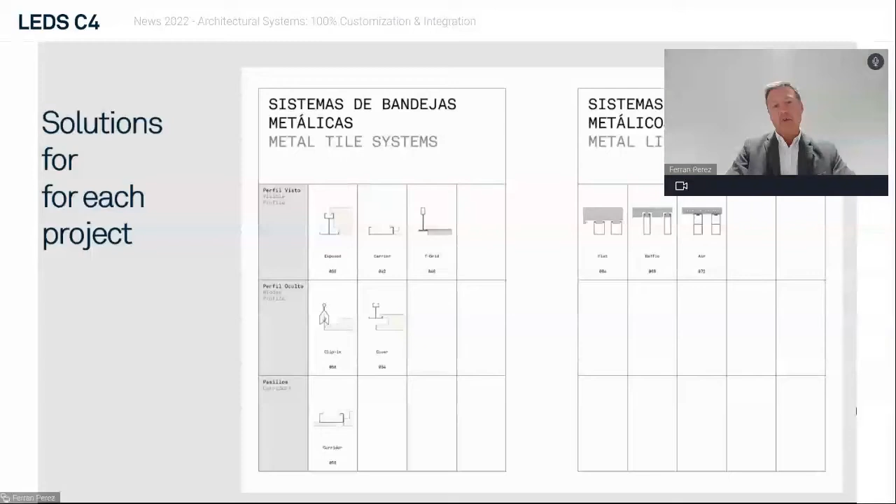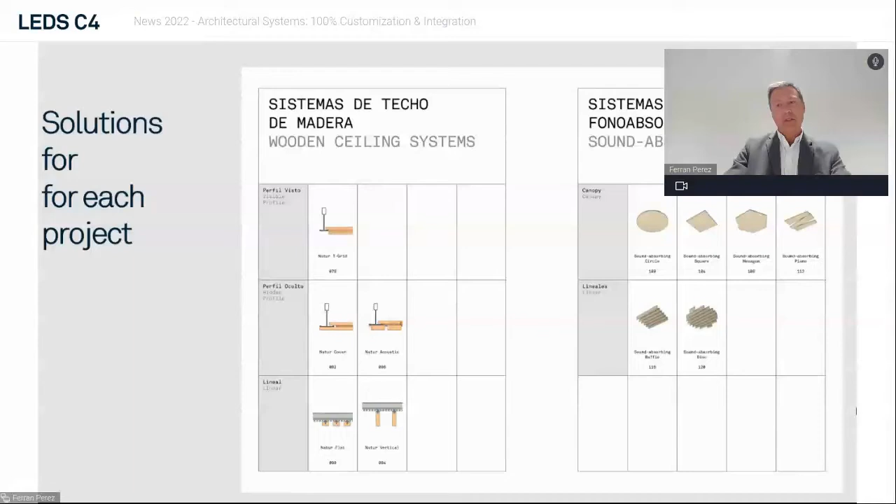In this catalog there are some blocks or columns of products related to the ceiling: metal ceiling system with visible profile, hidden profile, or specific applications like corridors, which is a metal linear system. We also have a wooden ceiling system, with visible profiles, hidden profile or linear. And the last one is about the sound absorbing system, canopies or other elements for sound absorption.

We would like to remark that we would like to collaborate with you in the creation of the project. Why? Because we have a big capacity to adapt this product, this ceiling, these tiles for your specific dimension, for a specific requirement. This is not a standard product that we have in stock or that distributors have in stock. We make the project with you, for final installation by the installer on site.

We pass the standard regulation in the European market, CE mark. We pass the ISO about quality, and the ISO about environment management. We pass health and environment responsibility regarding organic compounds, volatiles, and formaldehyde. Recently, LEDS was awarded the gold medal for sustainability. EcoVadis checks the environment, social and human rights, ethics, and responsibility pursuit.

If we start speaking about the metal system, we pass fire performance with a very good qualification: A2, s1, D0. What do these numbers mean? A2 speaks about combustibility - we have a very low contribution, the flame remains only 20 seconds. The second one speaks about smoke opacity - we have a very low contribution. The last one, the D0, speaks about particles, the drops of burning material - we have a very good classification. If we compare this to the requirement for offices, which is normally B, s1, D0, we pass better than this requirement.

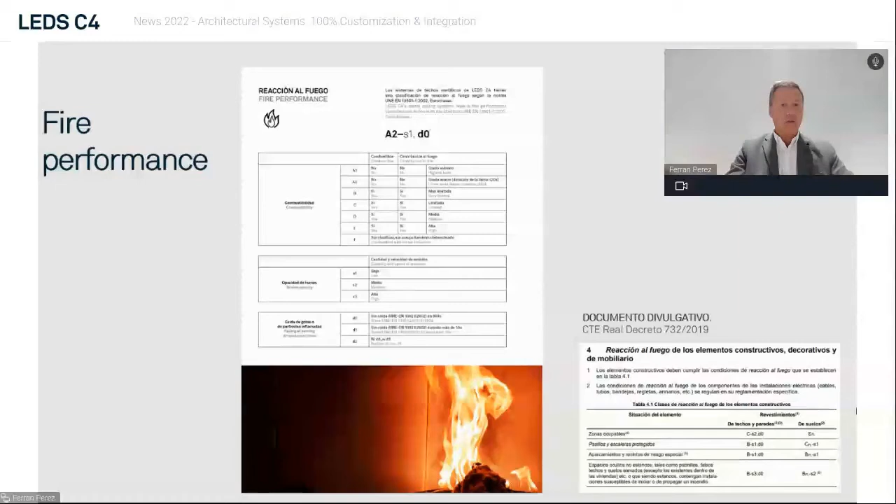When you are thinking about installing a metal ceiling in your project, you can choose a different pattern perforation. The pattern perforation is for aesthetic reasons or for sound absorbing reasons. In the chart, in the table, you probably cannot see well here, but you can check slowly in the catalog. You can see our values about the perforation, the distribution in parallel or in zigzag, and what the sound absorbing value is. And if you try one of these and need more requirement for sound absorption, you can add mineral wool on top. In this case, we arrive at about 90% of the sound absorbing.

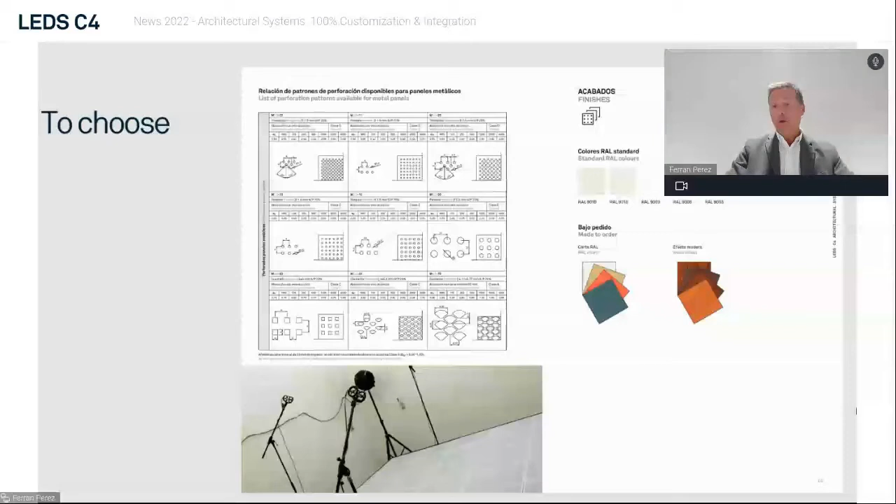We can post-paint all our ceilings with the RAL chart. We focus on the most common RAL colors for offices, but if you like a specific one, please tell us, we can paint it. And we can do the wooden effect on the tiles if you need or if you like.

What we do differently from other ceiling manufacturers is we incorporate the lighting system inside the tiles. In this case, we obtain a very clean finishing, a very clean adaptation. The lighting is incorporated in the tile without any frames, maintaining the same perforation, the same color, the same level, and we can add air conditioning. We don't produce air conditioning ourselves.

If you share with us the cut drawing, we can cut the tile for this drawing, and you receive a final global vision like this.

Speaking about the metal ceiling system, we have some profiles that receive different names. The catalog is presented like this. Here we have a column, and in this vertical column we have all the information about this system.

The first one is a photo, detailing how this system works. The next one is explained: it's a bending system. In this case, we can adapt all the dimensions that you need because it's a bending, we can adapt it easily. It's a visible profile, speaking about the standard model, but we can adapt it.

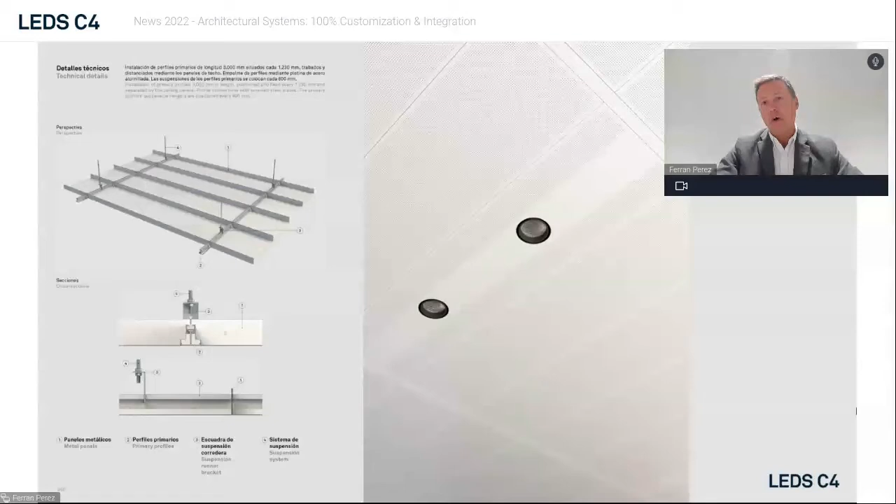The next page of the catalog has technical details. You can see in a cross section how this element works, how the tile works, how the profile works, how the hanger works. And the next photo is an inspiration photo showing how we integrate the lighting inside the tile.

It's not a closed system. You can choose another luminaire, and we can integrate it inside the tile.

This is a carrier system. The carrier system is the most common product for us. Why? Because normally when you install this ceiling system in offices, you have a facade, and the facade has vertical profiles with exact distances between them.

We can adapt the dimension of this ceiling to maintain your interdistance of the profiles. And in the future, when the final customer is thinking about making a division for future rooms, this carrier works in the same position as the profiles of the window.

This first one is named Carrier 100 because the base of this profile is 100. Obviously, it's a bended system, and if you need a Carrier 80 or another dimension, obviously we can do this.

The next one is basic. We use standard T15 or T24 profiles, but we add more value when we incorporate lighting or air conditioned tiles in this kind of system.

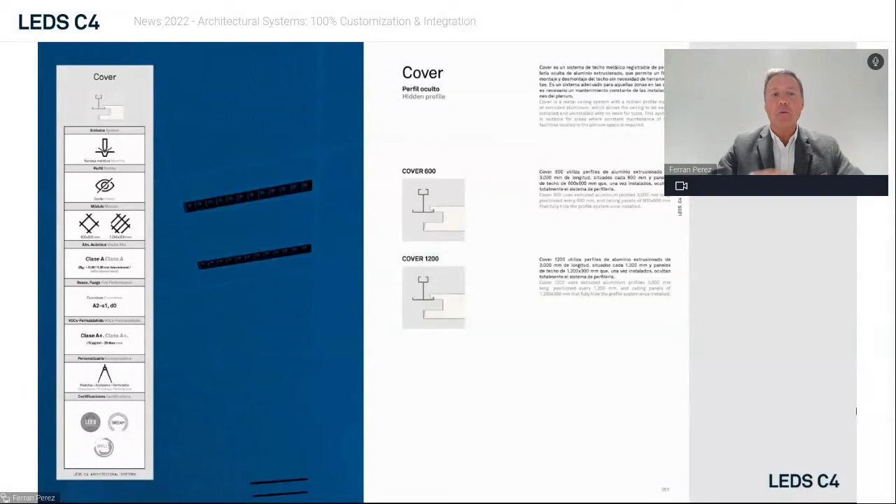Here I have all the information, but we make complementary information in a data sheet. In the data sheet, you have on this line what kind of thickness the tile has, what kind of thickness the profile has, how many microns for the paint, how to mount it, how to install it, and what we need to do for maintenance. For this system, here we have a photo.

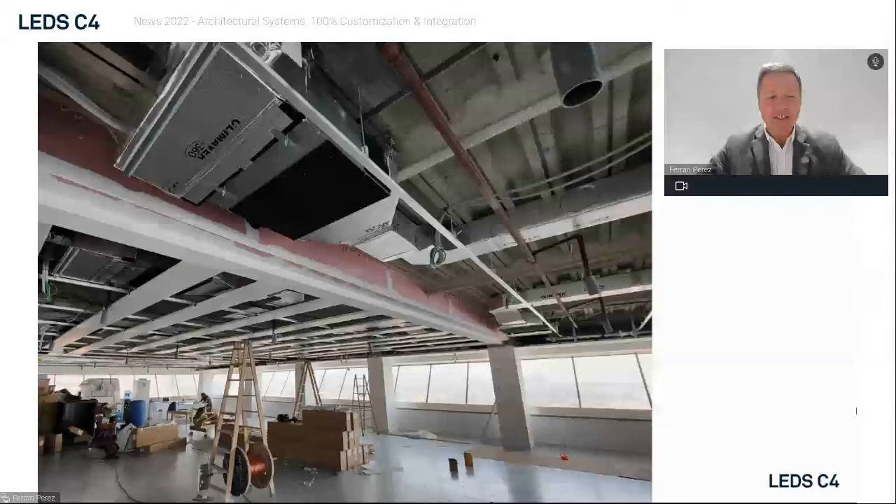When the installer starts to install, they begin by leveling the profiles exactly. After that, some tiles are put in place like this to maintain the inter-distance of the profiles, and to mark some dates for when the rest of the installers, electricians, or air conditioning team finish the job. Finally, we cover the whole surface with tiles, mark and cut the rest of the perimeter area, in this case with gypsum or something similar.

And this is the final result: ceiling plus lighting incorporating air conditioning, return air conditioning, and sprinkler. Here you only need to clean the ceiling, nothing more.

This is a specific application, similar to the other product we saw, the carrier. In this case, we can reduce the carrier or make the tile bigger, and it's very important with this system because we can achieve tiles up to 3 meters longer.

When we put a lot of square meters of the corridor, in cases like a hospital or schools or a university, all the installation passes through this corridor. We need to arrive directly and quickly at this installation. We can maintain the tile flat, make a slow swing, keep it flat - this is a specific application.

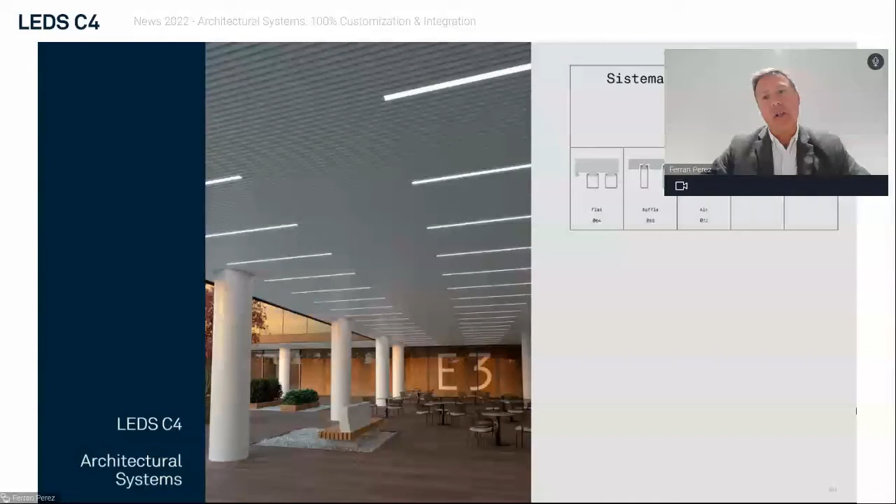It's a clean solution. Speaking about the linear system, we have 3 families. The first one is the narrow one, the Flat 15, in combination with our lights.

When we work with this kind of system, we are also thinking about the lighting - we design the brackets that the lighting system needs to obtain this kind of result. The next one works on the same line as the other, but the baffle is bigger, and we can make a perforation in the baffle which works well for sound absorption with felt or mineral wool inside.

And the last one, speaking about the linear system, uses two kinds of extruded profiles, 20 or 14, on a base. This is recommended in areas with a lot of people, where you need to cover the wall, or in areas that have a lot of wind or strong conditions. This is a very good solution for this kind of application.

We keep showing the wooden system. The wooden system has a different pattern of perforation or linear system. We use an MDF base with a wood fragment for fire resistance in this wooden system.

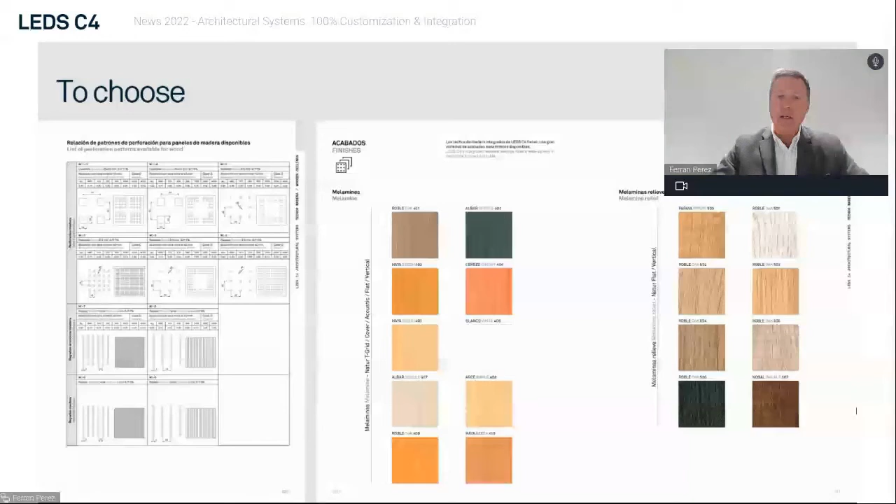We cover with melamine, or with melamine with relief. But if you have a big project and you choose another kind of melamine, please tell us and we will try to do your melamine in our wooden system. We have different solutions for a wooden system.

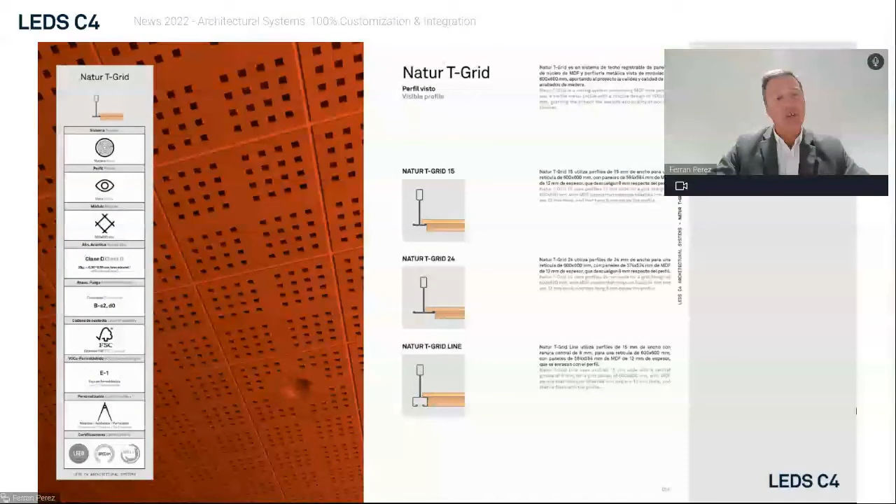We started with the basic T15, T24, covering it with wood, with different finishes and different perforations. The next one is when we cover the 24T profile in combination with lights and different finishes.

The next one is the Natur Acoustic, the best solution for a sound absorbing area. We make some cutting lines, and inside the cutting lines there are different perforations, and we can do a project like this. Here we can only see the joint at the end of the profile, but you don't see the joint along the length of the profile, because this joint is positioned exactly in the cutting.

The Natur Flat is a solution for a linear system.

We started working with 40 or 80, but if you need another dimension, please tell us. How this system works is honestly very easy.

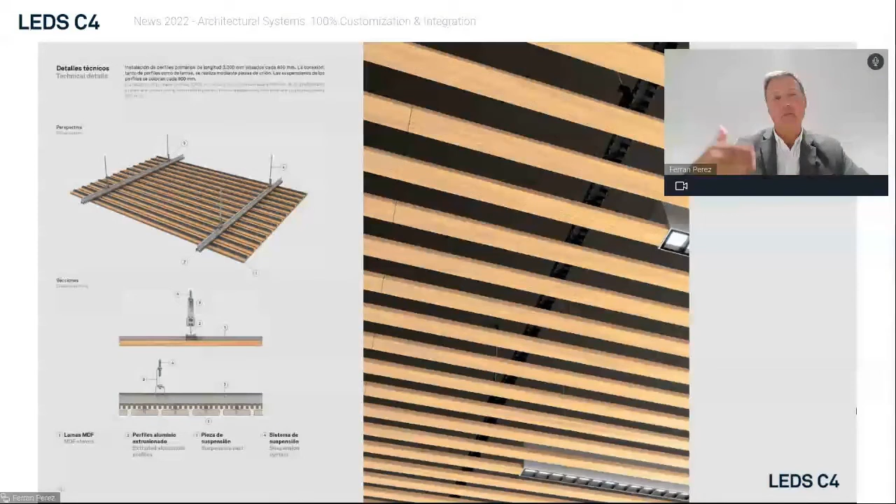We work with the T profile, an extruded T profile, covering it like a plastic tip, and after that we can connect the linear system in this tip, and in one system we can do different interdistances. We have one product, and you can install it in different positions, or propose for your customer different interdistances. The next one works in the same line, but with vertical linear elements - our Natur Vertical. The last piece is the sound absorbing system.

It's a mineral wool. We're starting at 40 millimeters. We can cover it with felt like this photo, white photo, or we can cover it with textile in other colors. If you're thinking of using felt, we can start with white, gray, or black.

And if you need another kind of color, we recommend the textile. It's easy, and you have a very big chart of colors.

We can do reports, acoustic reports, the same way we do luminic calculations or reports. We can do the same here with acoustics. If you share with us information about your area, your room, what material or product is on the ceiling, what's on the walls, on the floor, we can calculate your sound absorbing, your reverberation area.

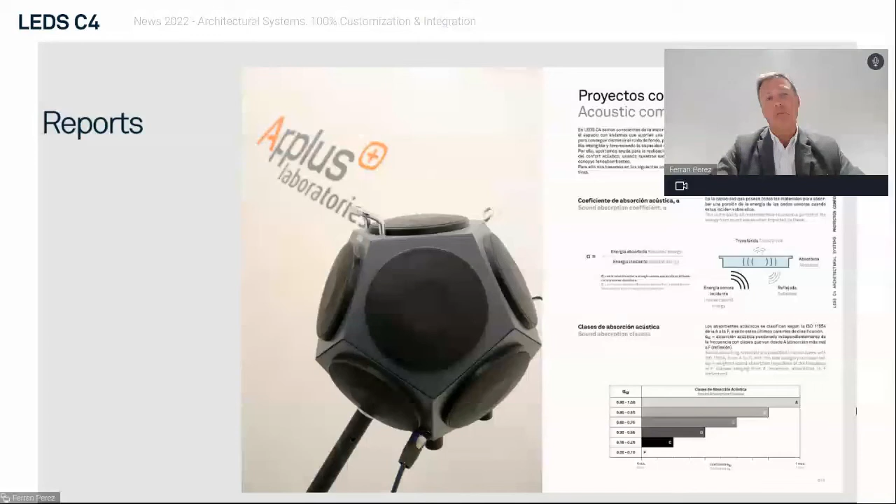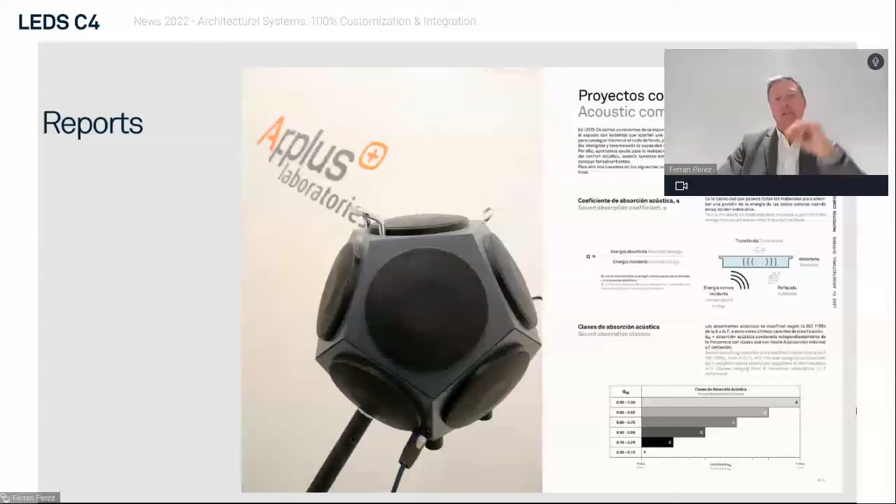We started with this family of canopies, or family of linear systems. Here is a circle 1000, because the diameter is 1000, but if you need another dimension, it's not a problem.

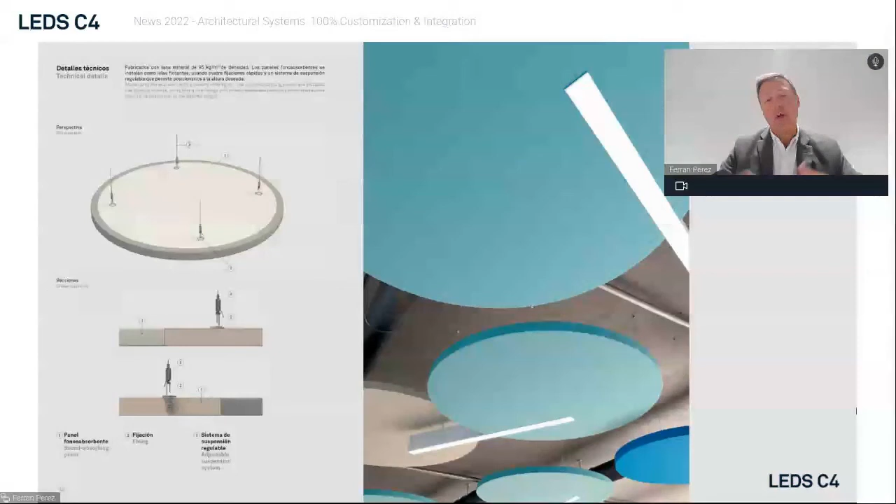In the same way as the rest of the ceiling, we can integrate the lighting inside the ceiling with any frame - a clean solution. You choose the lighting on one side, you choose the shape of your sound absorbing on the other side, and we handle the installation, making the brackets that the system needs for this kind of installation.

It's a very easy suspension system. It's a cable where you can choose the height that you need. It's very easy to install.

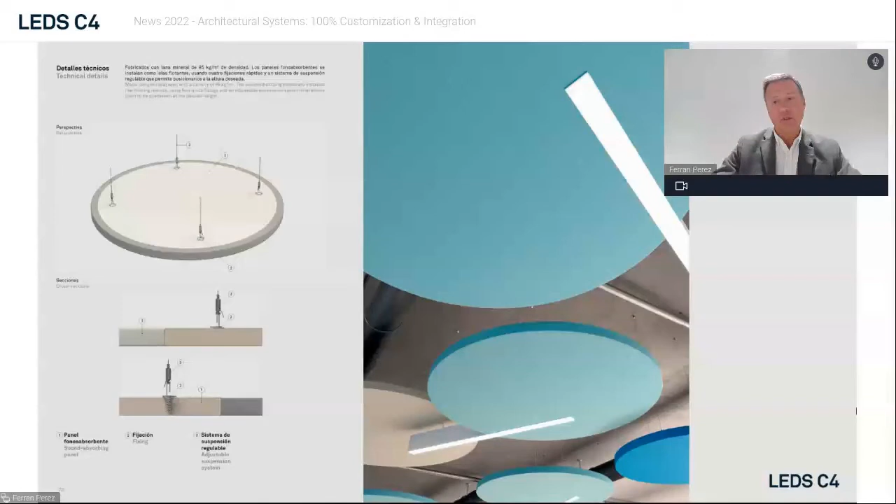You have one photo of this application in a restaurant with a light inside, with a different volume. You have another view of the same place.

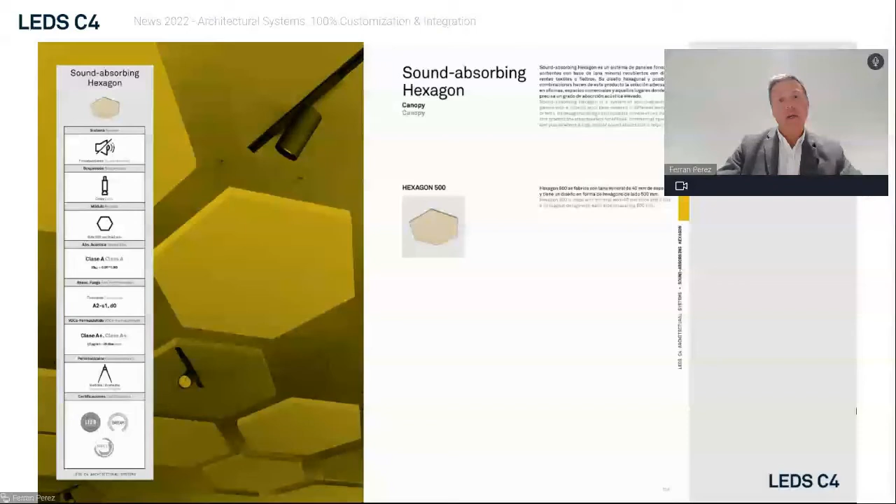We can make canopies in a square shape with light integrated. We can make them in hexagon with tracks in this case. We can make this shape like a piano - we call it piano because for us it looks like a piano keyboard.

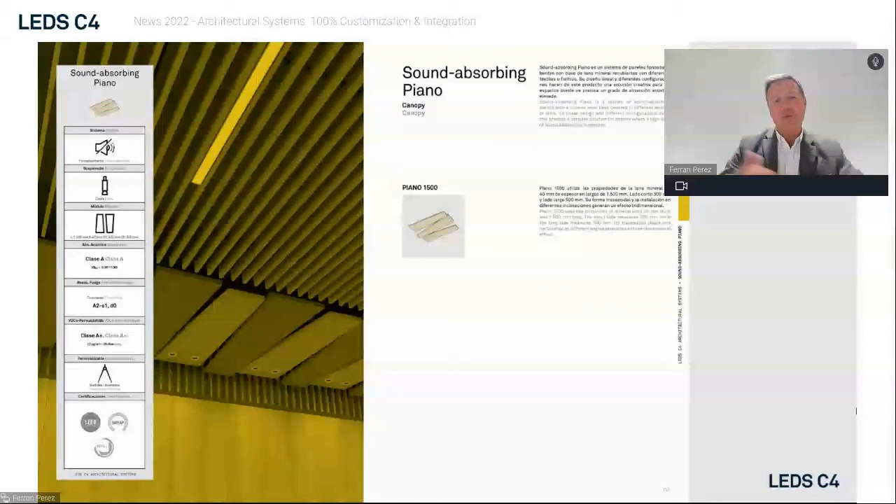We started with this dimension, but we can adapt it or change this dimension to fit your project.

You have a photo with one restaurant, one cafe. We can see the sound absorbing product with lighting inside, the ceiling, wooden ceiling in combination with the low track, different suspended lighting looks, and the piano near the facade, near the window.

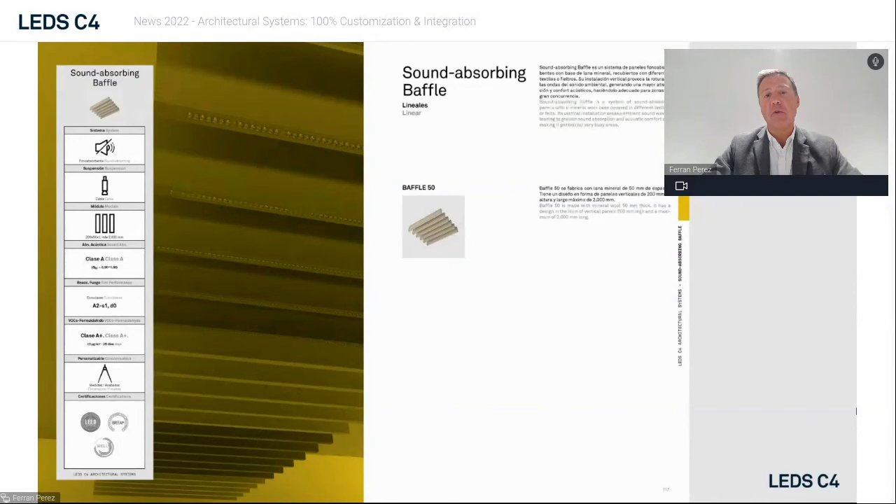And the last product is our linear sound absorbing system, the baffle. When we work with 5 centimeters at the base, we can integrate the lighting system inside. In combination, you have a very good solution and very good sound absorbing solution for rooms, offices, and different areas.

And from another point of view, we can use the same baffles cut like a circle. This system works in combination with one or more elements in your area.

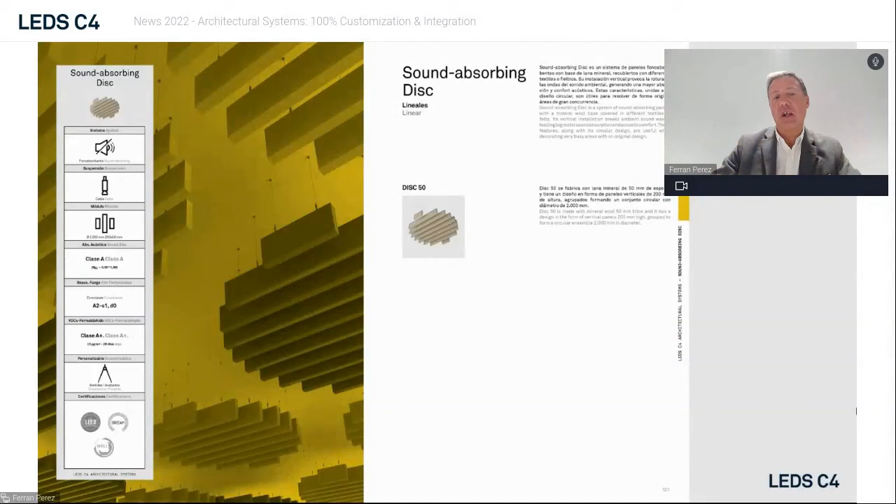That's all. I would like to point out that the integration with lights is our value, our strength.